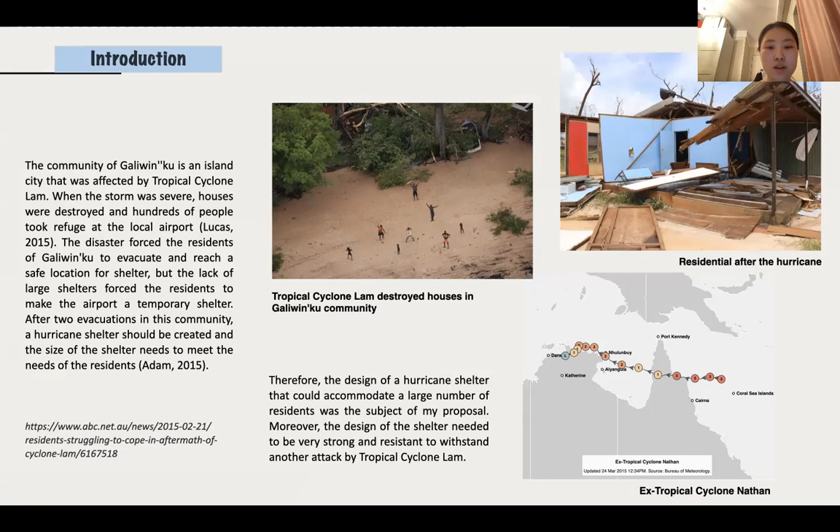There are no emergency shelters in the area to shelter from hurricanes. Therefore, I designed hurricane shelters.

The hurricane has caused a housing shortage as residents have been left homeless by hurricane damage to their houses. The district houses were built of toxic asbestos materials, and asbestos spilled across the island as a result of the hurricane.

The asbestos contamination delayed the reconstruction of the houses, and residents waited too long for their houses. Therefore, I designed a shelter with a simple structure that was easy to build, which would ensure that it would be built and put into use shortly and quickly.

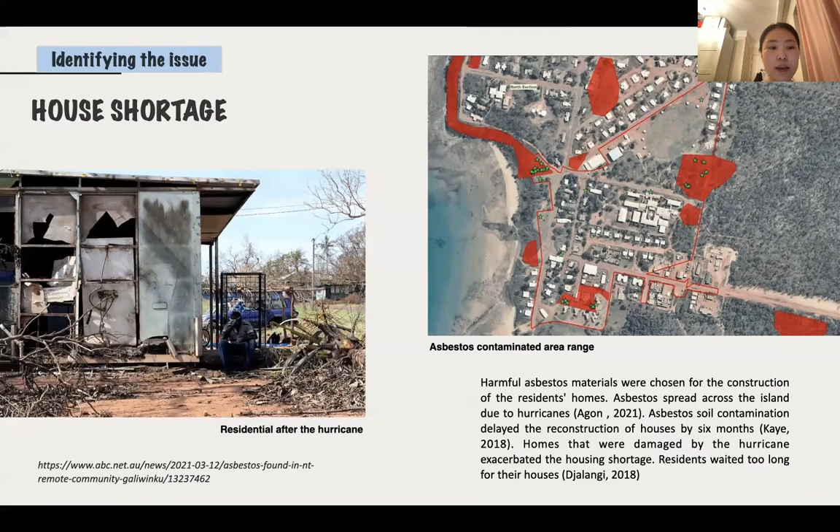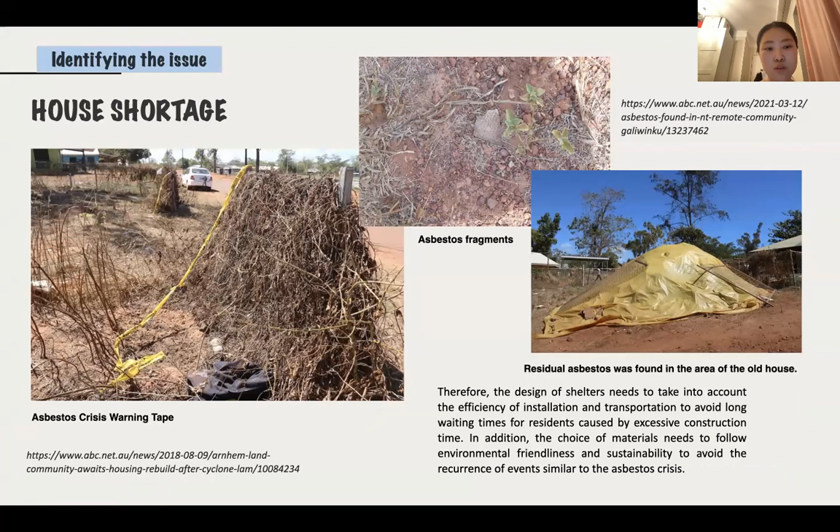In addition, I chose to follow a sustainable design in the choice of materials to avoid recurrence of events similar to the asbestos crisis. The lack of a large shelter forced residents to occupy public facilities as temporary shelters.

The school playground was occupied, but the ground was not sufficient to accommodate the residents in a hurricane emergency.

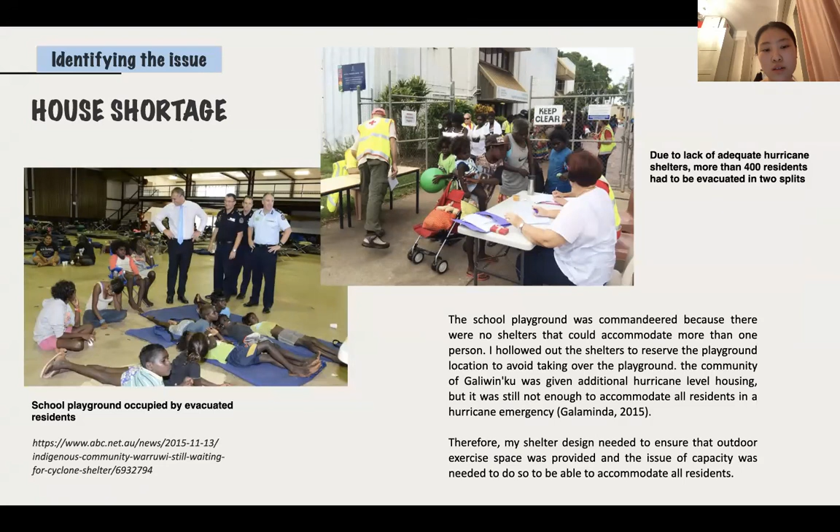My proposal focused on designing shelters that are large capacity, strong, easy to assemble, and sustainable.

I was inspired by the Chinese National Stadium in Beijing. It is hollow designed to make rational use of the indoor and outdoor space, and the steel frame structure is highly resistant to impact. I applied this versatility to the design of my shelter.

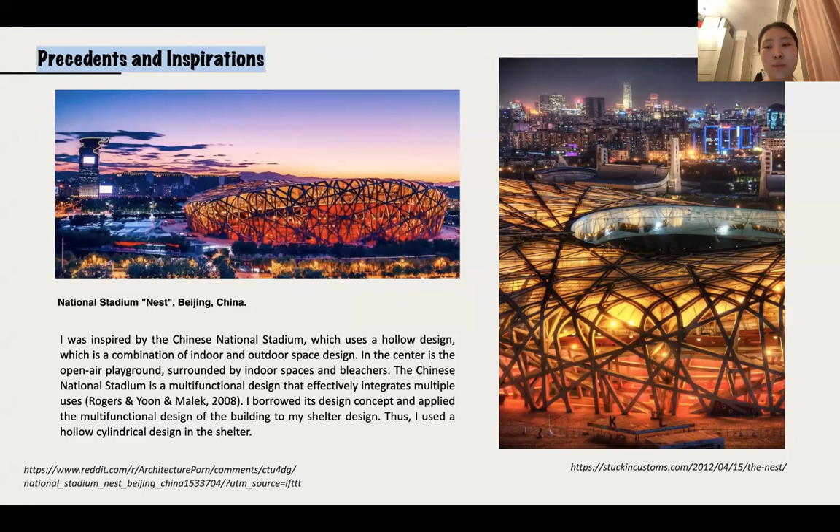Through design iterations, I designed 3 buildings as one shelter. I used hollow design to solve the problem of playgrounds being occupied by evacuees.

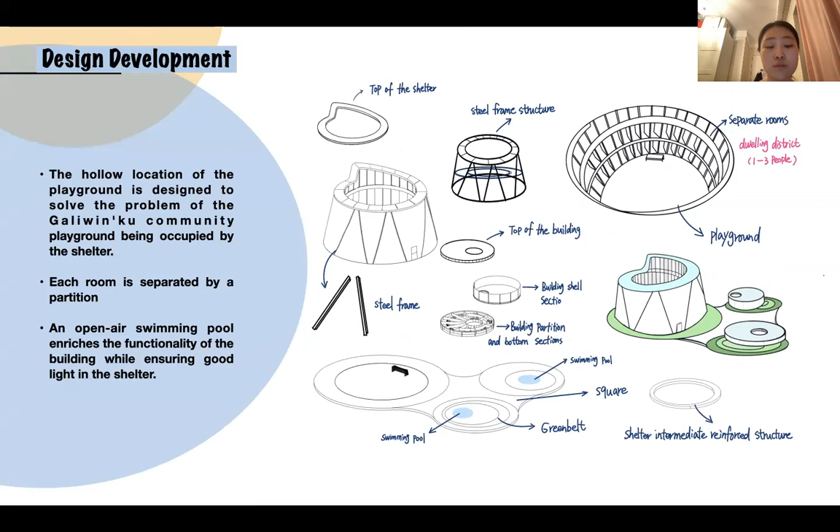This achieves good lighting and aesthetics, and ensures the provision of outdoor exercise space. The shelter is divided into living area, recreation area, rest area, and public area.

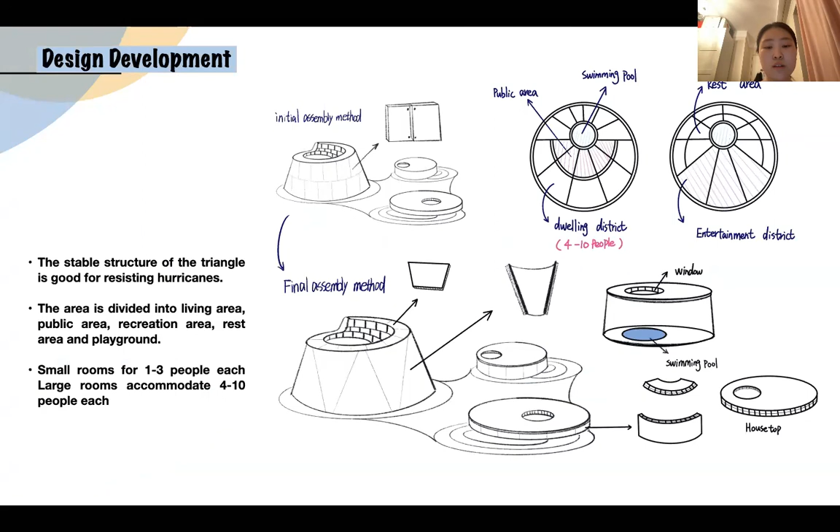The polycarbonate and steel frame structure is assembled in line, which is resistant and easy to assemble, and can be protected from hurricane damage. Each small room can accommodate 1 to 3 people, and each large room can accommodate 4 to 10 people. I used reinforced structural design in the middle of the building.

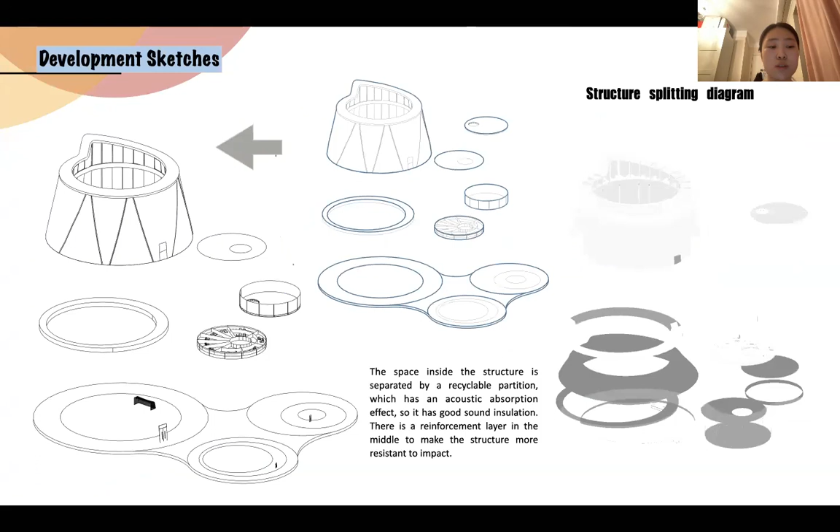This is a structural analysis of the shelter. It's divided into roof, middle, and bottom.

I chose polycarbonate, which is highly impact-resistant, lightweight, low cost, and aesthetically pleasing material. Each structure can be embedded in the steel frame structure, which improves the efficiency of assembly.

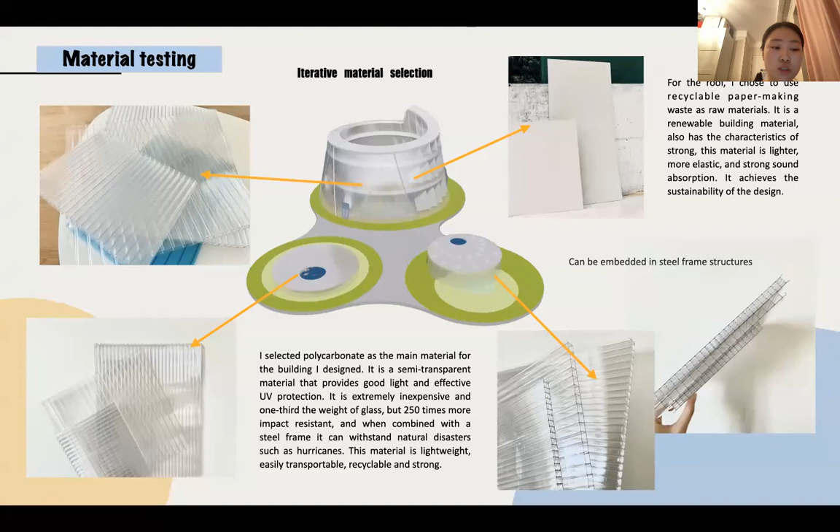It has good lighting, and I chose recyclable paper as a material for the room partition, which has good sound insulation and follows the design sustainability.

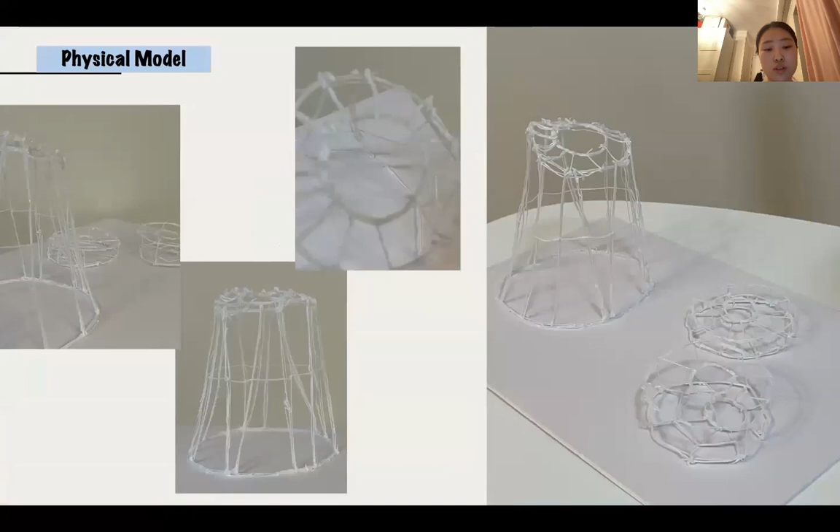My physical model expresses the structure of my shelter. I used a 3D printing pen for physical modeling.

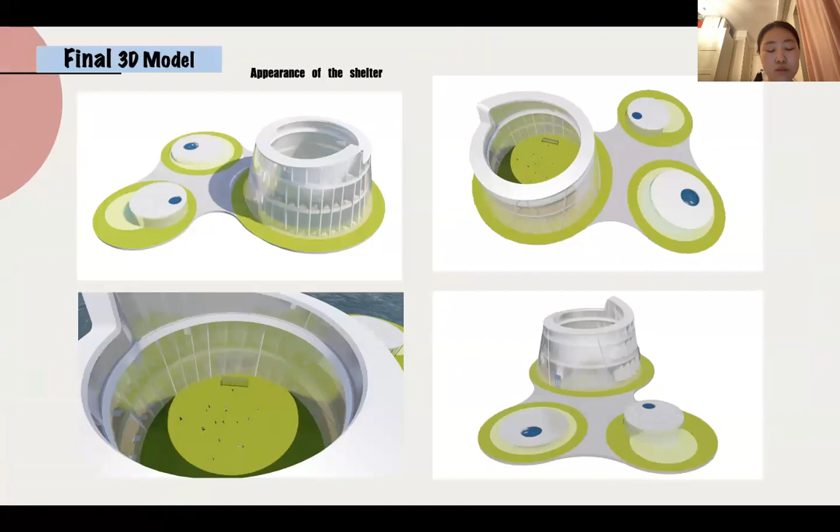This is how the final 3D model of the shelter looks like at the end. This is the final 3D model rendering of the interior and close-up of the shelter.